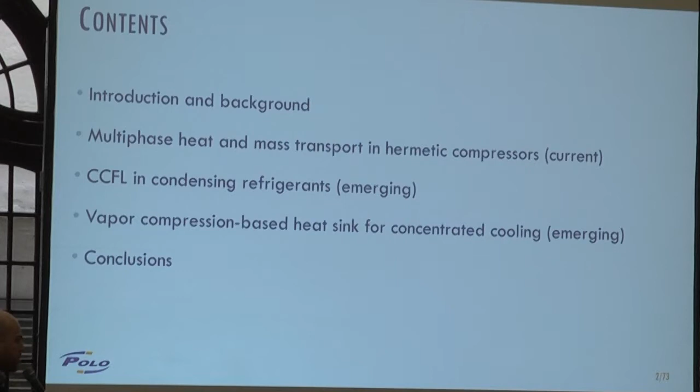The other topic is the countercurrent flow limitation in condensing refrigerants. Although condensation in thermal systems and refrigeration systems happens in any application, in oil-free compressors it brings some new interesting aspects into the analysis. And then finally, I'm going to present an emerging application of vapor compression cooling systems for cooling of electronics and power electronics.

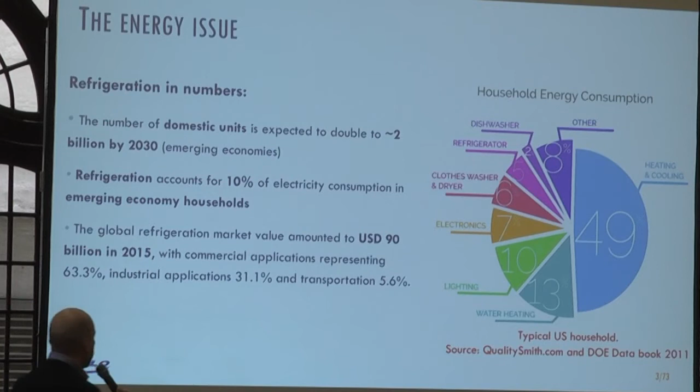So refrigeration is all around us. The numbers are actually very impressive if we consider all the segments of the technology, from fruit preservation to transportation and room air conditioning. If we only consider domestic units, the numbers are still very impressive. According to the United Nations, there are more refrigerators than cars worldwide, and also considering the emerging economies, the number of domestic units is expected to double in the next 12 years or so.

In terms of the share of refrigeration, it accounts for about 10% of the electricity consumption in emerging economy households. In developed countries, this share becomes even larger if one considers heating and cooling. So it's a very important industry, and the numbers are quite impressive indeed.

As a community, we have done quite well in terms of reducing both the direct and the indirect effect of energy and the environmental impact. If you consider the TEWI, which is the total equivalent warming impact, in the past 30 years or so, both parts have declined quite considerably. The direct effect is related to the emissions of refrigerant upon discarding a refrigerator or if you have a leakage. And the indirect effect is related to the emissions of CO2 associated with the burning of fossil fuels to generate electricity to run efficient and inefficient systems.

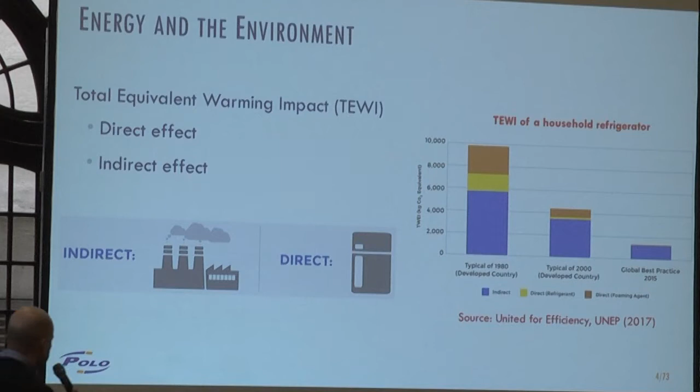The evolution is impressive, yes, and it's also driven by regulation. Hearing Professor Mastorakos's talk yesterday, the same thing happens in refrigeration. First, there is a challenge, the standards and labeling, and then the industry makes it happen, and then after that, only the scientific community tries to understand what's going on.

We have gone a long way into improving the efficiency of compressors. This red line shows the energy consumption of a household refrigerator over the years. Although the size of the refrigerator has increased a little bit, the volume, the blue line, there are still many challenges, most of them related to replacement of the global warming potential refrigerants. They are going to be replaced by hydrocarbons or CO2, and they also have their problems in terms of flammability, high pressures, and so on.

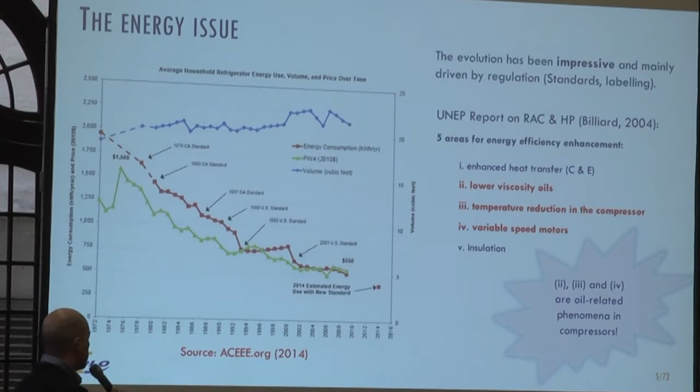About 15 years ago, when I was starting my career, I read a United Nations report on room air conditioning and heat pumps, and they identified five areas for increasing the energy efficiency in household refrigerator systems. I identified three main areas related to multiphase flow and heat and mass transfer, which were interesting to study, and all of them were related to the oil interaction with the refrigerant in refrigeration systems and compressors. So I thought it was an interesting area to work on.

So here's where I start my talk, and here's our typical vapor compression cooling system. It is composed of two heat exchangers, a condenser and evaporator, a compressor, and an expansion device that regulate the zones of high and low pressure, high pressure in the condenser, low pressure in the evaporator. In its simplest configuration, the cooling capacity of this system is controlled by the on-off of the compressor.

So we always hear in our kitchen the refrigerator switching on and off. Basically, it's controlling the cooling capacity together with a thermostat. And there is lubricating oil sitting inside the compressor in the sump there.

This oil's main role is lubrication of moving solid parts, but it also acts towards reducing noise, cooling, and sealing. It also maintains what we call the equalizing pressure, which is the pressure attained by the system when the compressor switches off while controlling the cooling capacity. The oil absorbs the refrigerant inside the crankcase and reduces this equalizing pressure. The lower the equalizing pressure, the less torque is needed to start up the compressor again. Less torque means less copper in the electrical motor, and less copper means a cheaper compressor. So selecting the lubricating oil is important for that aspect as well.

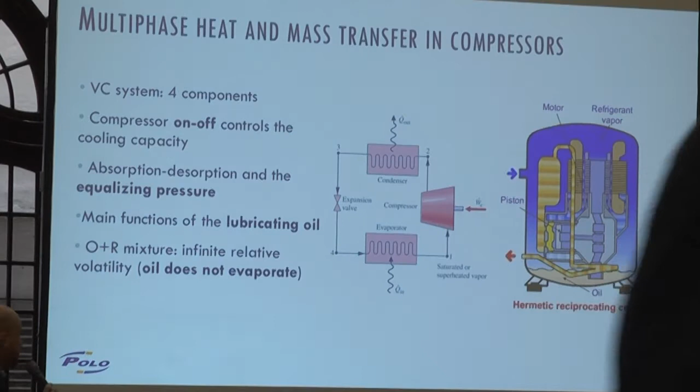So the first set of experiments we did was to measure rates of absorption of the refrigerant in the lubricating oil. We devised this PVT cell in which we have the oil sitting there, initially under vacuum. Refrigerant from this tank flows into the PVT cell, and we measure the mass flow rate. After the pressure equalizes, we close the system, and the pressure decreases as a result of the refrigerant absorption.

The interesting thing here is that with synthetic refrigerants, mainly R134A and the new types of olefins being considered, the liquid refrigerant is heavier than the lubricating oil. So we get a really unstable layer, and the absorption phenomena is dominated by natural convection. On the other hand, with CO2, isobutane, or propane—natural refrigerants—the liquid refrigerant is lighter than the lubricating oil, so the absorption is governed by diffusion only, which is a much slower process.

Here we can see typical diffusion-dominated absorption. It takes hours for the pressure to equalize. This video was one of the first studies we made a few years ago. We can see the natural convection absorption phenomenon taking place in R134A.

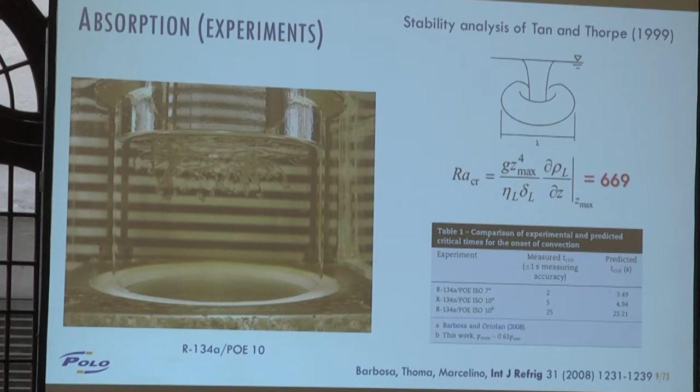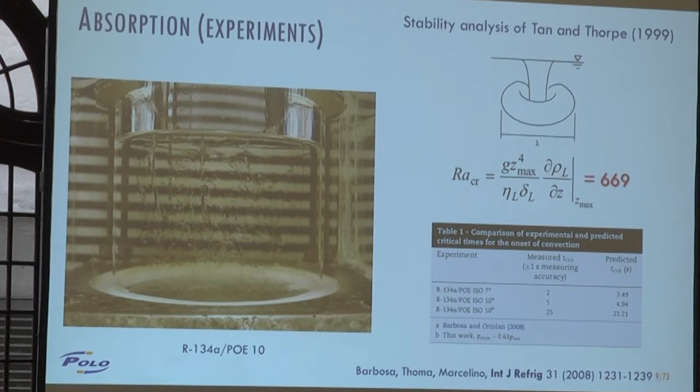Based on this stability analysis by other authors, we developed a model to calculate the critical Rayleigh number for this instability to take place. The result was that the critical time wasn't too large, so it didn't matter much how long it took for the system to become unstable—it was basically governed by natural convection. We also developed models for convection-dominated absorption. These were simple models, but they were incorporated into codes used to design compressors. Absorption governed by diffusion was also modeled, and this was very important for developing models for CO2 compressors.

When you have CO2 and the lubricating oil, the system is very non-ideal, meaning you need to consider thermodynamic non-idealities in order to calculate this diffusivity. The swelling effect is also very important—the refrigerant is absorbed in the oil, and the oil layer expands quite significantly, and this has caused some problems in the field.

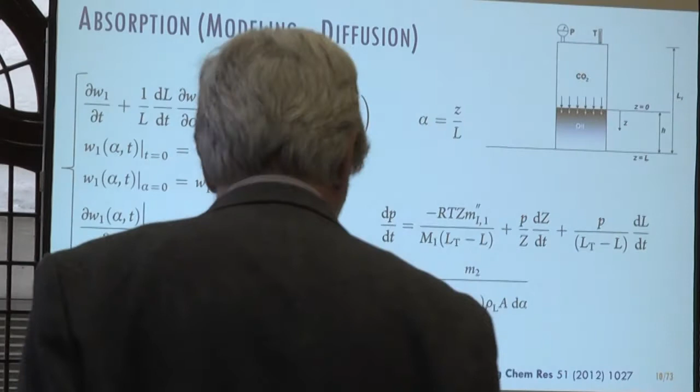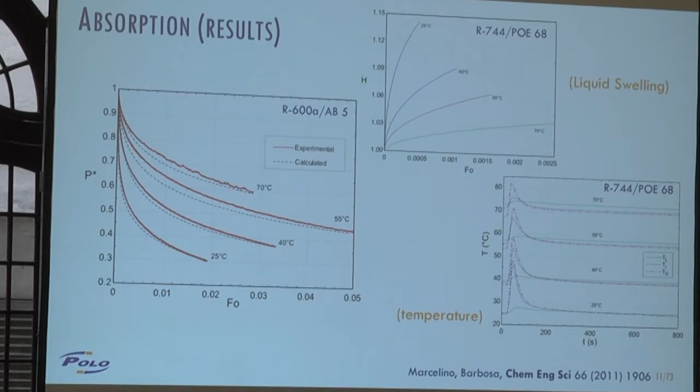The model itself is quite simple. We need to take into account thermodynamic effects, and basically what we predict is the pressure as a function of time to check if the model is working fine. We can see here that the pressure behaves accordingly with the experiments, and here is the swelling effect of the CO2 absorption, which can be quite significant.

Now moving on to the other aspect of the problem: foam formation. We did some batch desorption experiments. This is the test section we used, quite different from the one we had before—it's a long tube because we want to see the foam growing inside. This is connected to a mass flow meter. We want to measure the refrigerant desorption rate starting from a saturated mixture inside the test section, and we have a magnetic agitator here in order to trigger the desorption phenomenon.

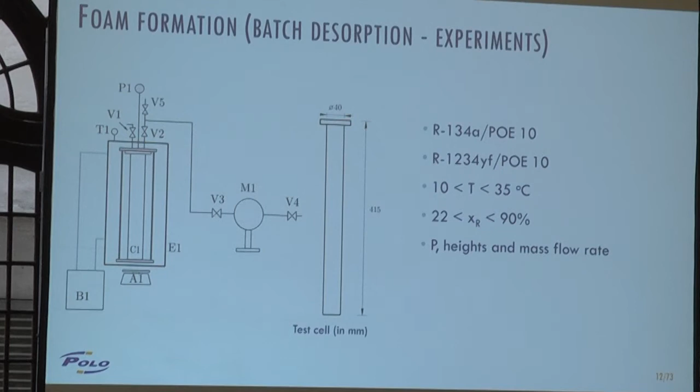So we did this experiment with R134A and 1234YF and some synthetic lubricant. Here are some videos as well. This video is quite long, so I'm going to just show some clips here.

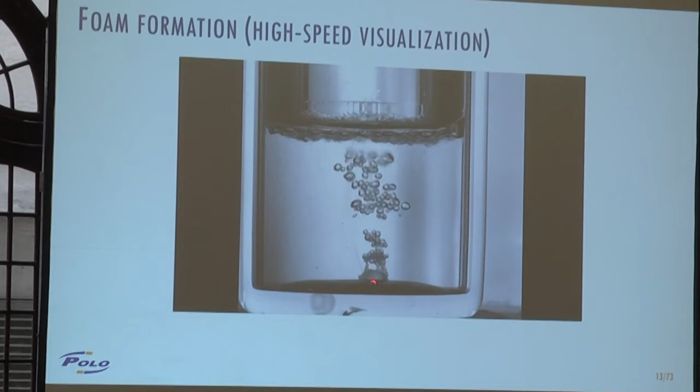So what you see here is the magnetic agitator, and the nucleation site starts at that surface. They are triggered there at the surface, and this is quite comparable to what happens in the real system, because you have the oil pump in the sump, and the sump also rotates there.

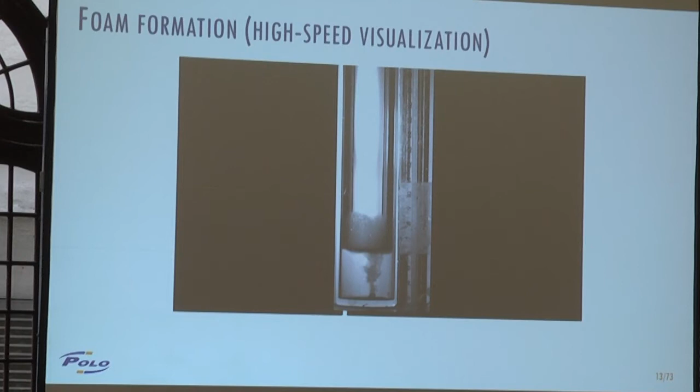And we can see the bubbles reaching the surface, and because of some surface tension forces, the foam will grow, and you can see the typical foam structure with the plateau borders, the foam growth, and then later the foam decay.

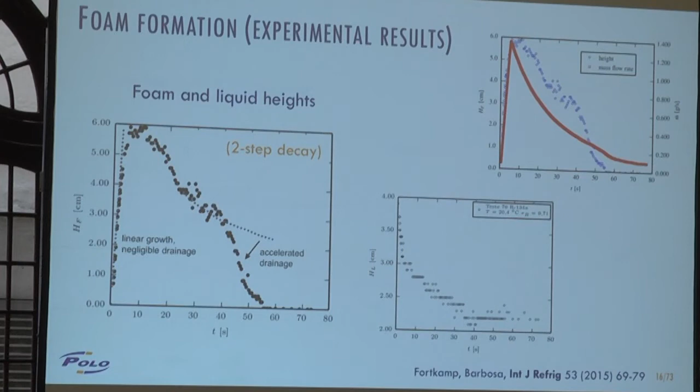And we adopted a control volume approach to model this problem, based on mass transfer rates between the two domains. So an overall mass balance is used to calculate the height of the liquid layer, and then there's a liquid species mass balance to calculate the concentration and so on.

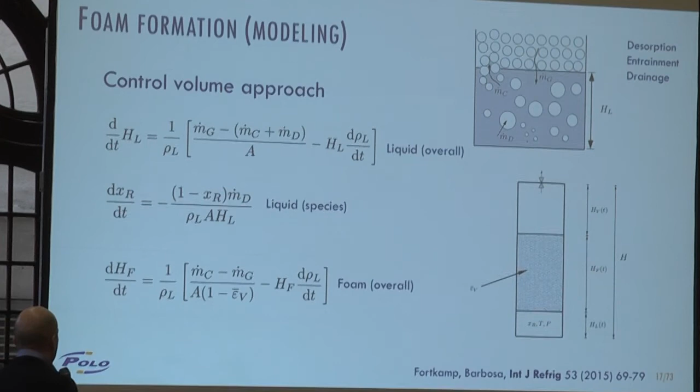And we rely on closure relationships for these mass fluxes. So the m dot d is the desorption mass flux, basically associated with the evaporation at the interface of the bubbles. Then we have the entrainment mass flow rate, responsible for carrying liquid from the bottom to the foam layer, and finally the drainage through the plateau borders reaching the bottom layer. We have developed some phenomenological models for each one of those fluxes.

The desorption mass flow rate - we relied on classical nucleation theory to come up with a relationship for that. Basically, we have inside this mass flux a Gibbs number, which is the relationship between the mechanical work required to create the bubbles and the liquid supersaturation, which is the energy available to create this new phase.

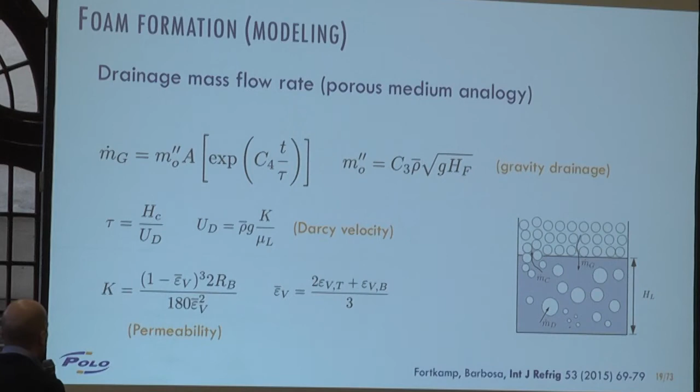And the entrainment closure relationship is based on a continuity of mass at this interface, and for the drainage mass flow rate, we relied on the porous medium analogy to calculate the flow through the plateau borders by using an equivalent permeability for this flexible porous medium.

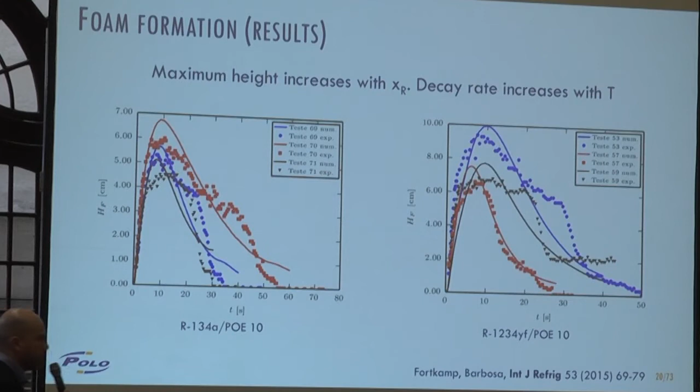Of course, we need some empirical constants to fit the model, but overall, from an engineering standpoint, the results were quite good, and we could predict with some degree of accuracy the behavior of the height of the foam layer. We were not quite successful at predicting the two-step decay, because I think we need a more detailed, multidimensional approach to modeling this effect. But in order to be incorporated into design codes, it was quite successful.

Obviously, running in the background, we have to have some infrastructure to characterize these physical properties, so we can measure not only the viscosity, but also the phase behavior of these mixtures and other properties as well, such as electrical properties and some surface properties.

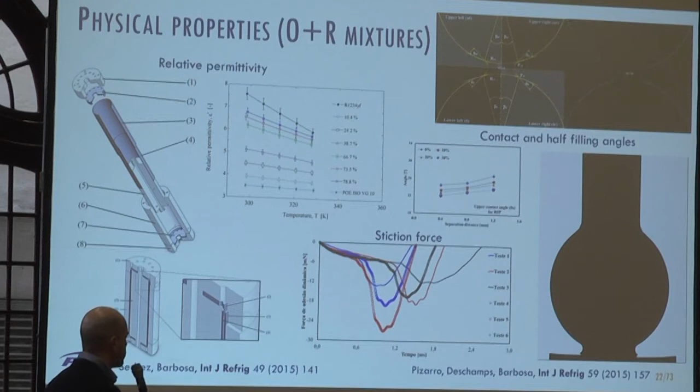So now moving on to the second part of the talk, I'm going to talk briefly about this issue with the countercurrent flow limitation in condensing refrigerants. The main drive for this research is the use of oil-free compressors. So when you have a compressor that is oil lubricated, the compressor has to sit at the lowest part of your system, because the oil needs to go back to the sump by gravity.

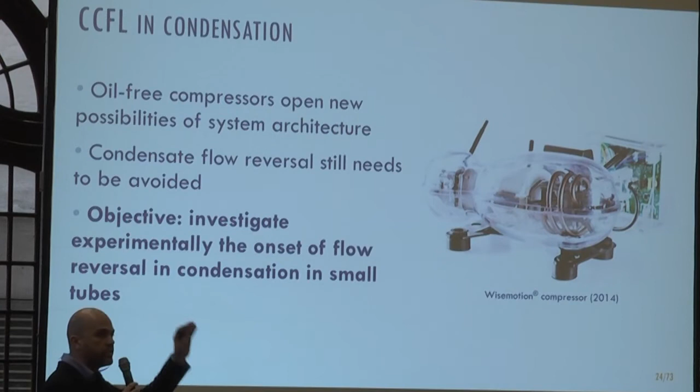When you have an oil-free compressor, the designer has the freedom to position the components of the system at his or her will, provided that liquid formed in the condensing line does not flow back to the compressor through the discharge. So this is a classical problem - countercurrent flow limitation, flooding, and flow reversals - a classical problem in the nuclear industry, but then we found some interesting application here in refrigeration system design. So we want to basically look at this problem.

We have an upward flow of refrigerant, which is condensing in a vertical or inclined tube. As the liquid is formed, the gas loses its ability to carry the liquid upward, so the liquid that is formed starts to oscillate. And this is what we don't want.

So we have this experimental facility here. It's basically a refrigeration loop. We have the oil-free compressor, and here we have the condenser, the first part of which is our test section. We guarantee that at the inlet of the test section we have a fixed inlet superheating degree, and so we have condensation.

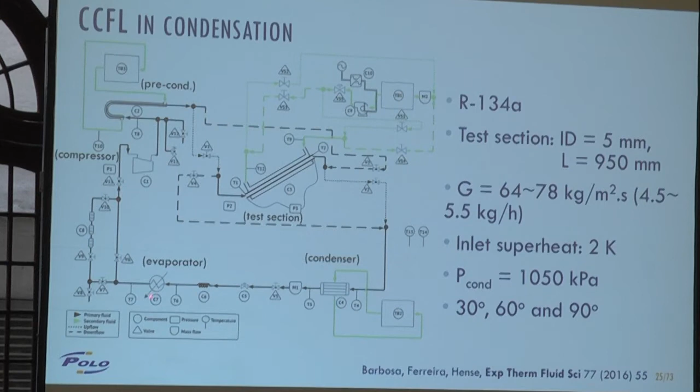Here is a counter current flow heat exchanger. Then downstream of this test section we have another condenser, just to make sure that we're not going to have a two-phase mixture entering the expansion device, then an evaporator, closing the system.

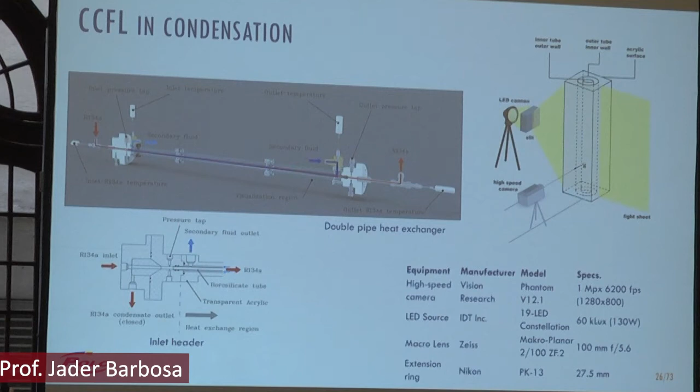So this is a closer look at the test section. It's a counter current flow heat exchanger, as I said, so the cooling water flows on the inside the annular gap. In this particular study, we carried out a visualization study in order to identify the conditions at which flow reversal would start to occur.

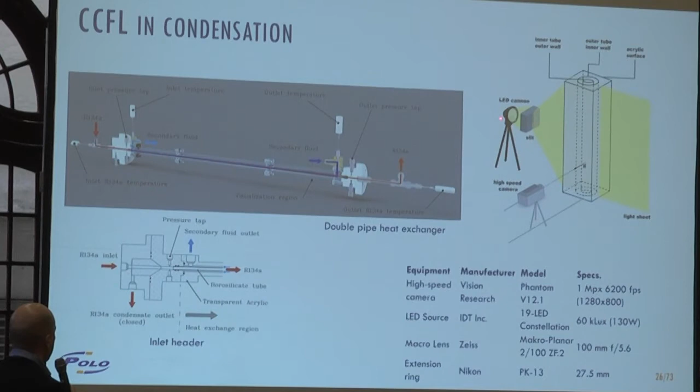So basically, here's the test section. We have a high-speed camera and an LED source with a slit in order to create a kind of light sheet to illuminate part of the flow. So here it's what I was trying to explain.

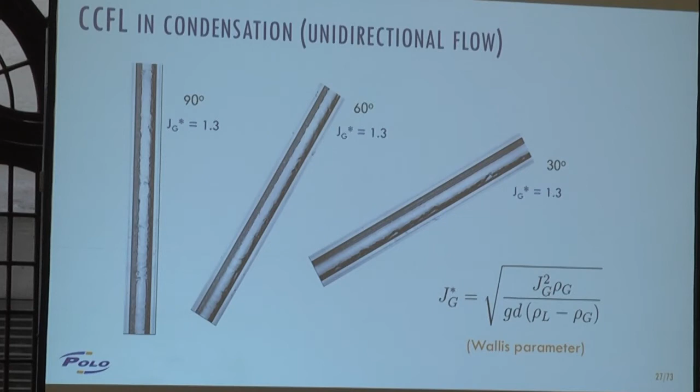When we have a high vapor content, the so-called Wallis parameter, which is a modified Froude number, is greater than 1. That means the vapor is capable of carrying the liquid upwards. But as the condensation rate increases, we start to have a higher liquid content, and the vapor loses momentum to drag the liquid upwards. If we increase that a little bit further...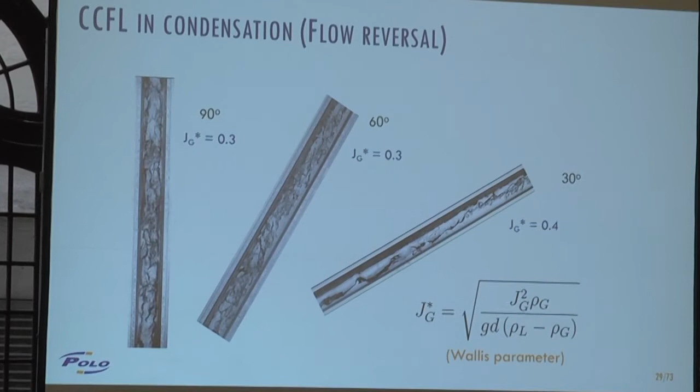...then we start to see the liquid starting to flow back, and that's what we don't want. We don't want to see this transition from annular to churn flow. Not that we don't want to see it, we just want to make sure that it doesn't cause any unwanted effect.

So in this particular study, we developed an image processing technique composed of a few steps, in order to make those images of the liquid film into a spatial temporal array, so we can study their time and position dependent characteristics.

So basically we digitize the images, and this video shows, for downward flow, what we have in terms of the liquid film on one side of the tube.

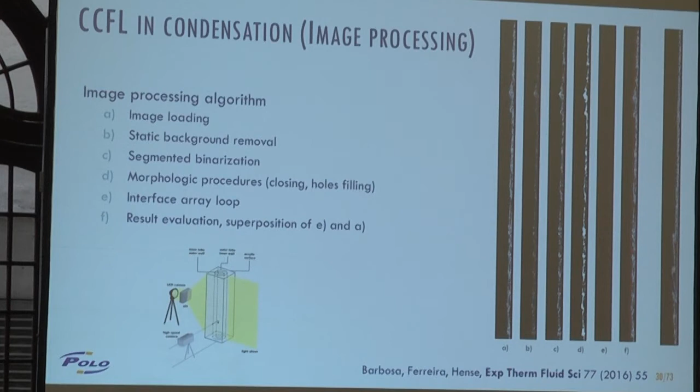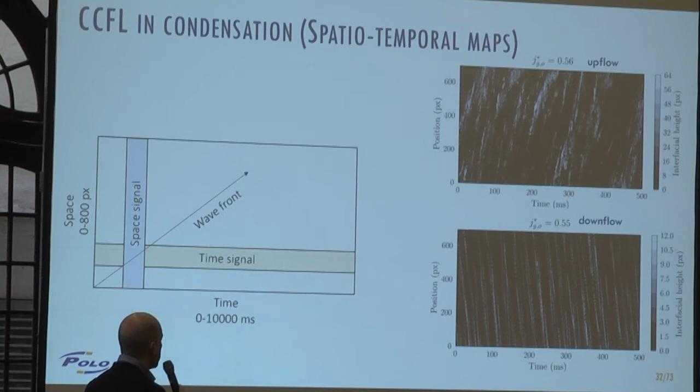So in this condition here, the Wallis parameter is greater than 1, so in upward flow the flow is unidirectional. But when we have the Wallis parameter on the order of 0.5 to 0.6, we can see that the wave starts to decelerate and have a behavior which is seen in adiabatic annular flows, related to the onset of liquid entrainment and so on. This was actually one of the first studies to measure this wave behavior in condensing systems.

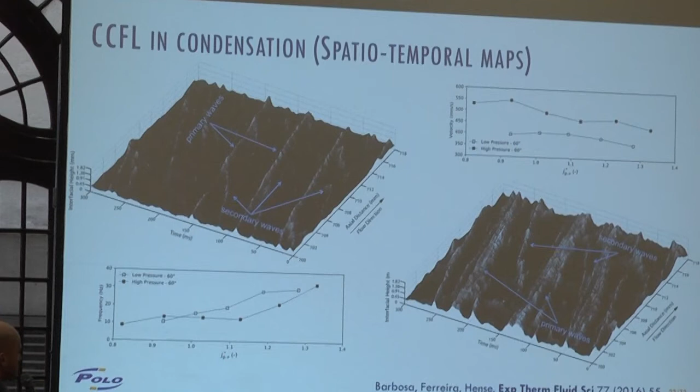So another study we did, trying to explore this technique a little further, was to study slug flow initiation, which is not related to refrigeration but is an important problem in the oil industry. We used the same technique in order to capture the formation of liquid slugs.

And since this is a turbulence conference, I thought it was interesting to mention that we used a turbulence model here to try to model this phenomenon of slug initiation using a CFD code. The results were quite encouraging, but we need to improve this from the side of the mathematical modeling and the experimental technique as well.

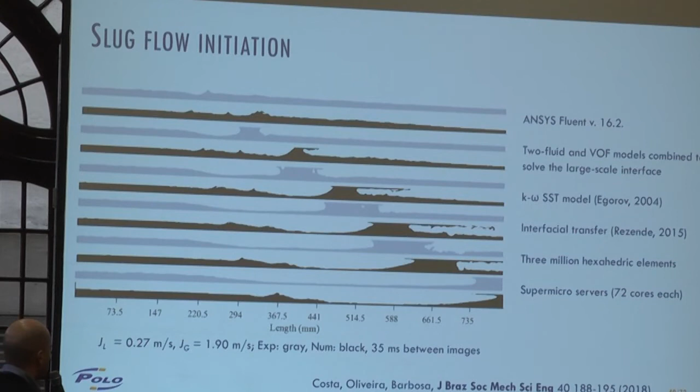And we can see, when comparing the experimental work and the numerical work, the evolution of the liquid slug along the tube.

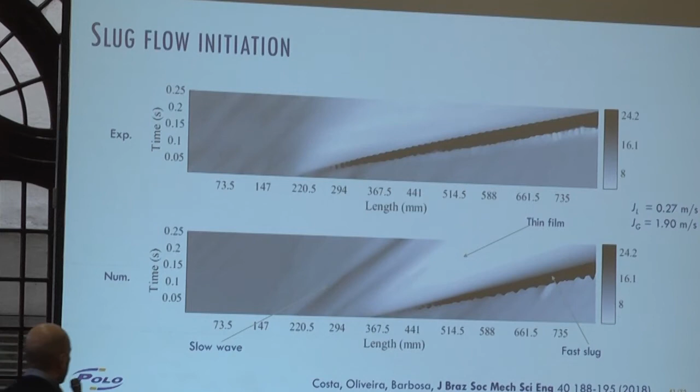So now, moving on to the last part of the talk, one needs to find new applications for vapor compression systems, and one of them is cooling of electronics, cooling of concentrated heat sources, such as power electronics and other systems.

So we came up with this idea, we call it Sphinx, and it stands for spray heat sink integrated with the expansion device. We try to explore the high heat transfer coefficient associated with impinging jets and sprays, and the unique ability of refrigeration systems of having the heat sink temperature below the ambient temperature.

When you have a liquid circulation system, the lowest temperature that you can have is the ambient temperature. But when you have a refrigeration system, you can operate at temperatures which are lower than the ambient temperature. So it's a double gain: you have a high heat transfer coefficient and a temperature inside the heat sink which is below the ambient.

So we couple the expansion device and the evaporator into a single unit. The liquid, high pressure liquid coming from the condenser will reach the top of this device and will expand through orifices, which will create an impinging jet on a heated surface.

So this is the experimental apparatus. Again, it is a refrigeration loop. In this case, we have an oil-free compressor. It's a small-scale compressor, not actually a miniature compressor, it's like a mesoscale compressor. It fits on the palm of your hand if you have a large hand, but it's still smaller than most compressors.

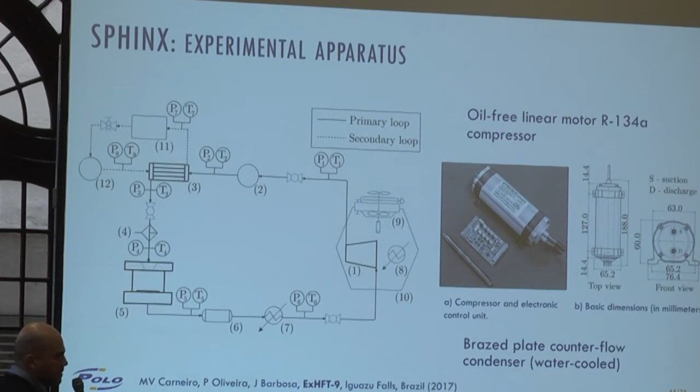Downstream of the compressor, we have a mass flow meter and condenser, and then from the condenser, the Sphinx unit, and then we have a trace heater just to control the inlet superheat into the compressor, closing the system.

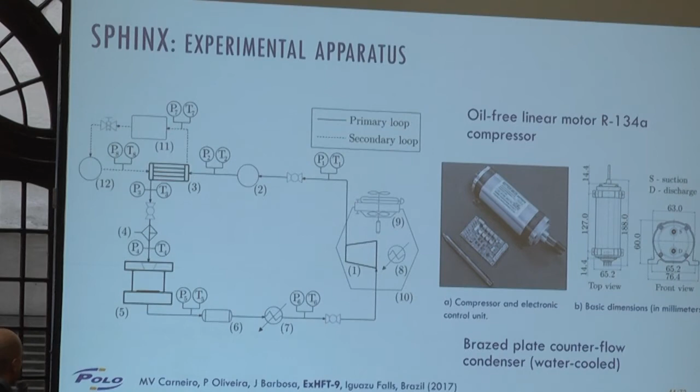In this study, we also devised a calorimeter to measure the power consumption and the heat rejection rate by the compressor. We put the compressor inside this control volume, and we have a thermoelectric cooler which is responsible for maintaining the temperature inside this ambient equal to the temperature outside. By measuring the power in and the power associated with running the thermoelectric cooler, we can calculate how much heat is being dissipated by the compressor.

So all of this system is verified against the first law. We have a very careful thermal balance there.

This is an actual pressure enthalpy diagram of the system. So 1 and 2 is the compressor, here is the condenser. From 3 to 4 is the actual useful cooling effect of this device. And then, actually the numbers are not quite right here, but this piece, 4 to 1, is the heating power associated with the trace heater that has to be used in the experimental facility, but not necessarily in the real application. I can explain that a little bit better if someone has a question.

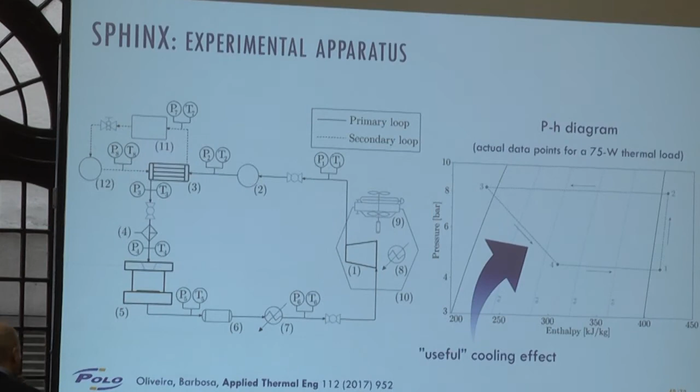So these are the independent and dependent variables in the study. Basically, we can vary the jet length, which is the height of the chamber, the distance between the orifice and the heater, the number of orifices and their diameters, the compressor stroke, although we operated in most tests at full stroke, the hot end temperature, which in the experimental facility is controlled by a thermal bath, but in the real world will be the ambient air temperature, and the thermal load, of course.

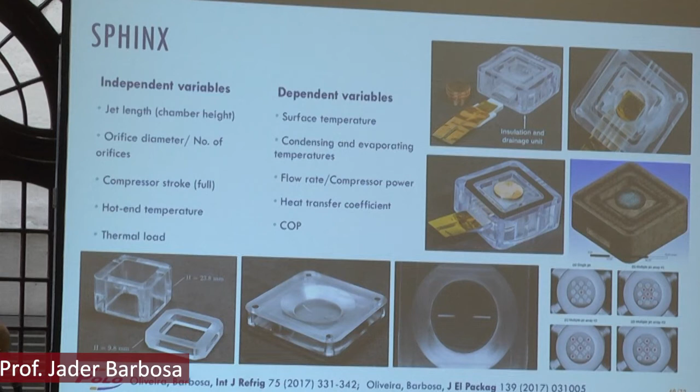Then the dependent variables: we measure the surface temperature, the condensing and evaporating temperatures. It's a closed system, so if we change one thing, the whole system responds in one way or another. The flow rate and the compressor power are dependent variables as well, and we measure them. The heat transfer coefficient can be calculated based on those measurements, and obviously the COP, which is the most important parameter in this study.

We have studied several orifice configurations during the course of this project. I'm going to explain them a little better, but basically what I'm going to show here is a comparison between colliding jets and directly impinging jets on the surface. We can play with the number of jets and their configuration, because at the top of this piece we place another piece with dummy orifices and actual orifices, and so on.

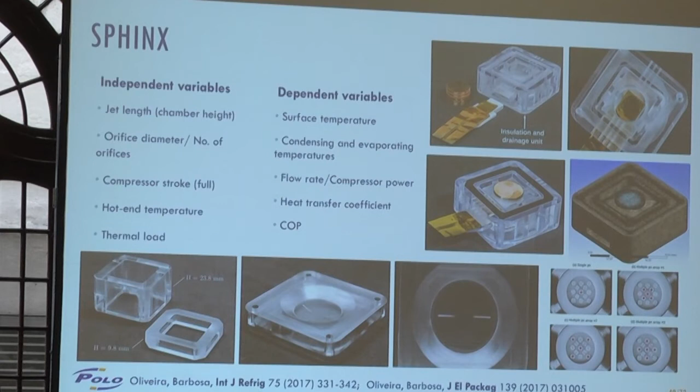The visualization was mostly done using a high-speed video camera, with some LED sources, mirrors, and diffusers. We tried not to actually measure droplet size, since that's quite a challenge in a closed system, but instead focused on the interaction between the impinging jets and the liquid film formed on the surface, and measured using RTDs on the surface.

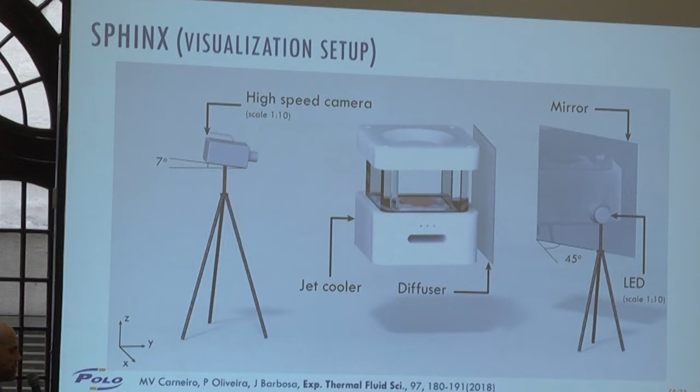So the colliding jet configuration is as follows: at the top cap we have a unit which can have 3 or 2 orifices. These are inclined orifices, and they meet at a point inside the chamber. As the jets collide with each other, they form a spray cone that impinges on the surface. It's actually a quite useful way to atomize the jet into droplets.

Here are some videos which help show that. This is for a taller chamber, and this is for a shorter chamber. You can see the 3 jets meeting at this point, forming a spray colliding on the surface there. These waves here are the spent liquid that flows on the window.

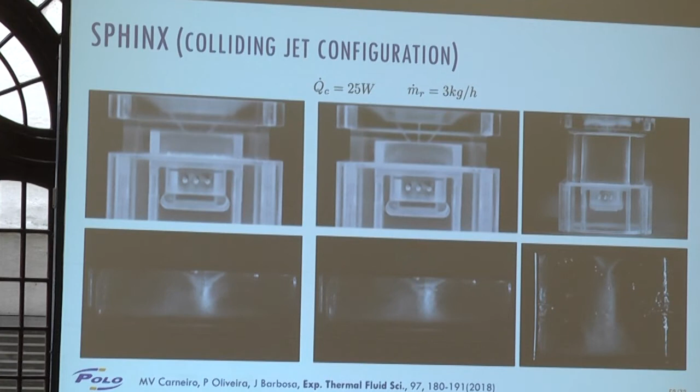The parallel jet configuration is easier to understand. Basically, we have that unit here on top. We can have dummy orifices there of different sizes, and we can play with this configuration.

In order to have a comparison that is more fair, when comparing colliding jets and parallel jets, we use the same area of passage, the same orifice area. Because it's also difficult to control the refrigerant charge due to different volumes, we always start the test with the same wall superheat for the initial thermal load. It's a fair way to compare.

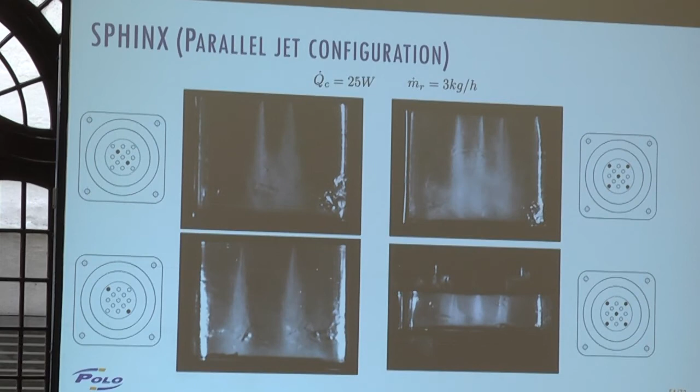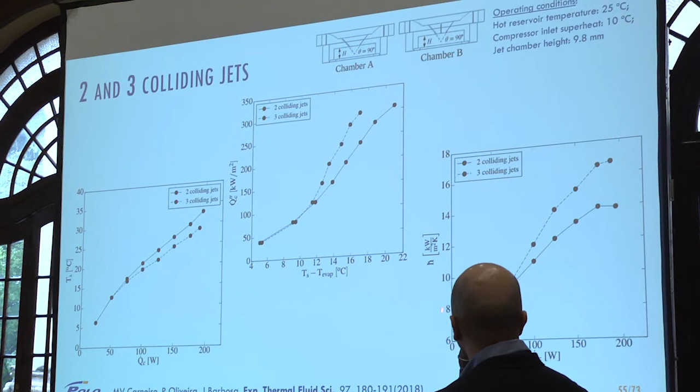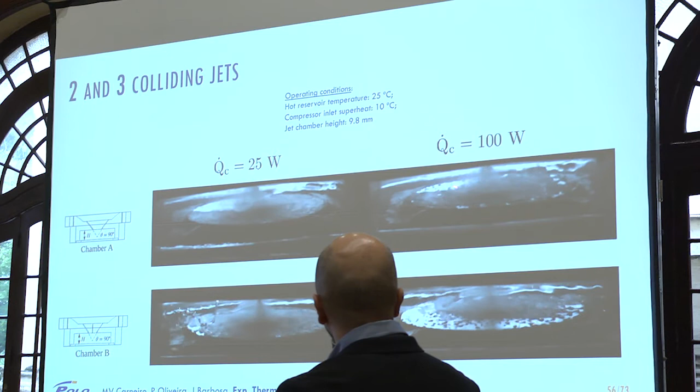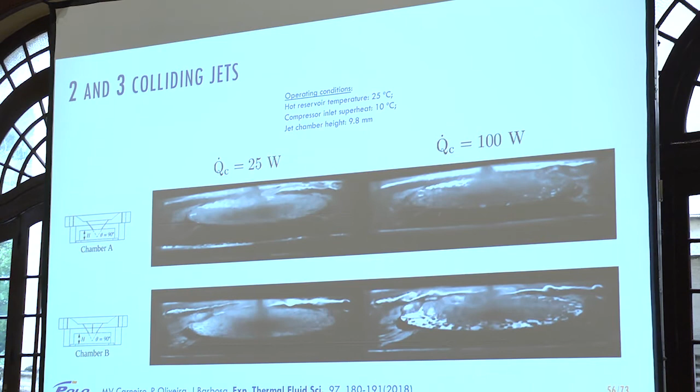These are the first comparisons we have, comparing 2 and 3 colliding jets with the same jet chamber height. Obviously, as expected, 3 jets perform better than 2 jets. You can see this from the boiling curve and the heat transfer coefficient curve. That's because we have a better distribution of liquid on the heated surface. With two jets, there is a dry spot even at 25 watts of thermal load, which persists up to 100 watts. This is the main cause for dry out, because that dry spot just grows, and it's not possible to wet that surface anymore.

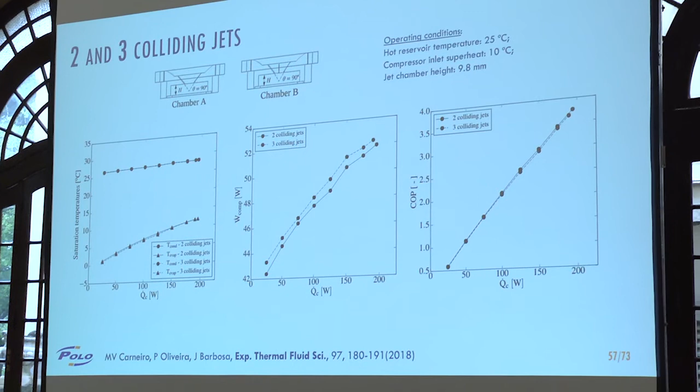For reference, we measure the saturation temperatures, the pressures, the compressor consumption, and the COP. What's interesting about this study is that we can play with the number of orifices and their configurations. The thermal response of the heater depends a lot on that, but the thermal response of the system as a whole, in terms of COP and compressor consumption, is not so different.

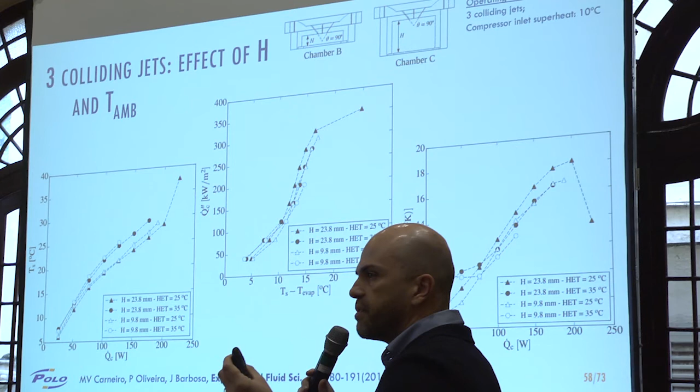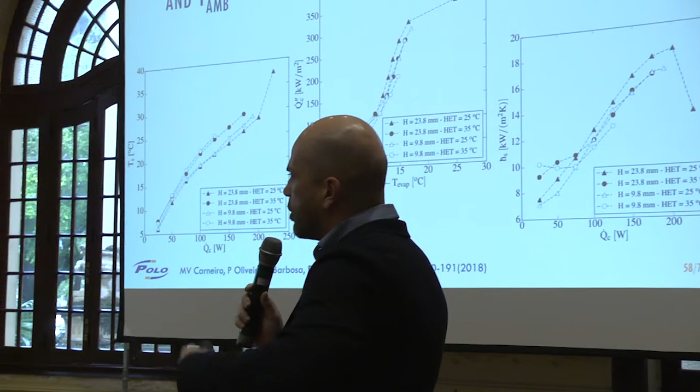Here's a comparison between the effect of chamber height for 3 colliding jets, and also the effect of ambient temperature. What we can see is that with a shorter chamber, these white symbols, dry out is reached earlier because of splattering of the liquid onto the surface. With a taller chamber, the impact circle is a little larger, so the droplets don't splash back, and the liquid is capable of wetting the system a bit better.

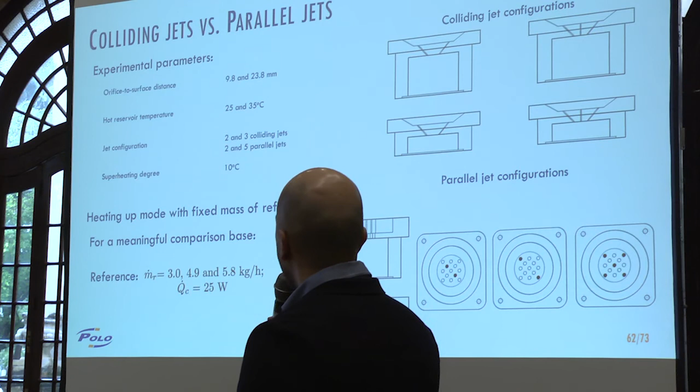I'll skip these videos since we have similar ones in the next slides comparing colliding and parallel jets. Again, for a meaningful comparison, we took a reference case using the same equivalent orifice area between the colliding and parallel jets. In the parallel jets, we play a bit with the configuration of the active orifices.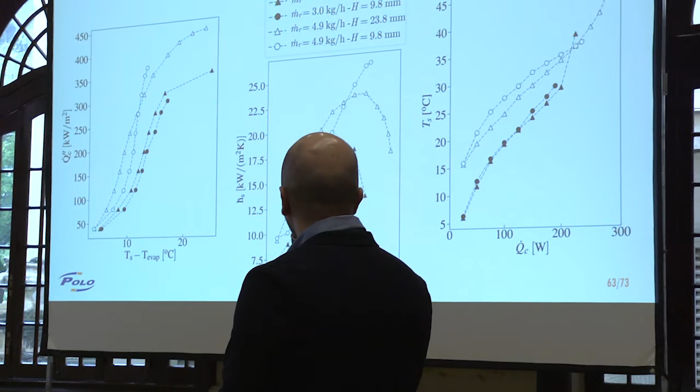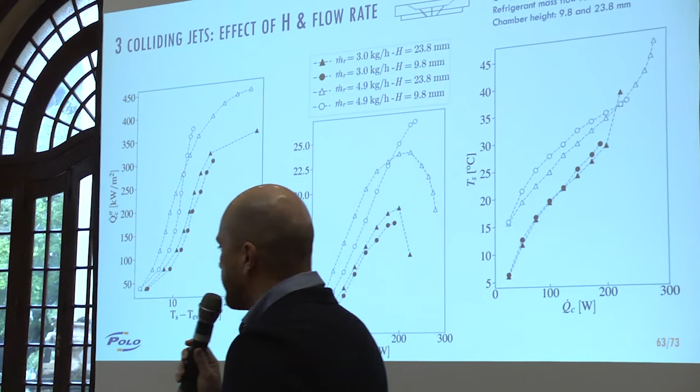This is the effect of H, the height, and the flow rate. Basically, the higher the flow rate, the better the response of the system. Impinging jets and sprays are very sensitive to the flow rate, so when you increase the flow rate, the heat transfer performance increases quite well. And this is the boiling curve.

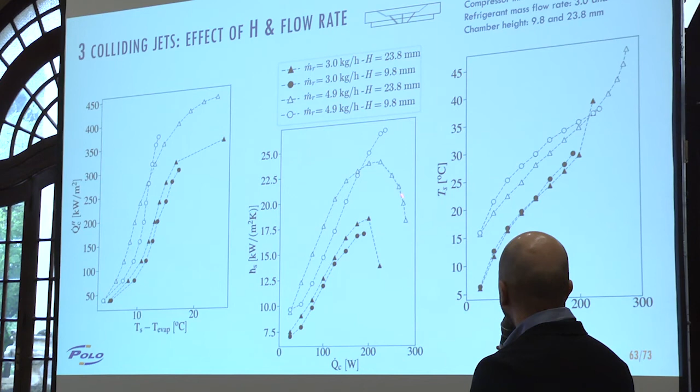We can see that the higher heat transfer coefficient is achieved for the higher mass flow rate, and for the colliding jets, we can see the decrease of the heat transfer coefficient because of the increase of that dry spot. For some reason, for colliding jets, the dry out is not as sharp as in the impinging jets.

So I think I'm running out of time. I'm going to just show this video here for two flow rates.

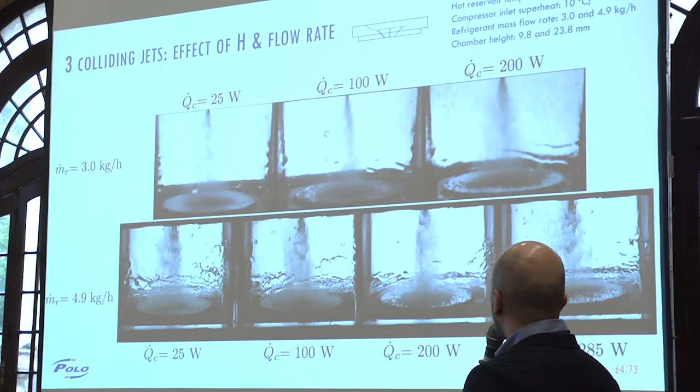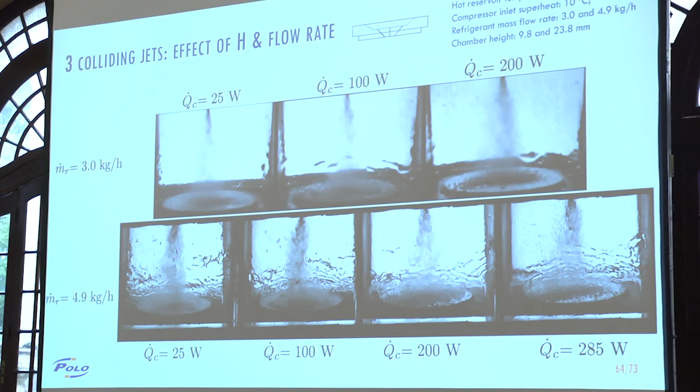As we increase the thermal load, we can see that the liquid starts to dry here at the surface. So what is clear here to us is that in order to improve the effectiveness of this system, we need to work on the surface. We need to increase the wettability of the surface in order to stick the liquid more onto the surface and delay that dry out. This is something we are going to pursue in the next steps of this work.

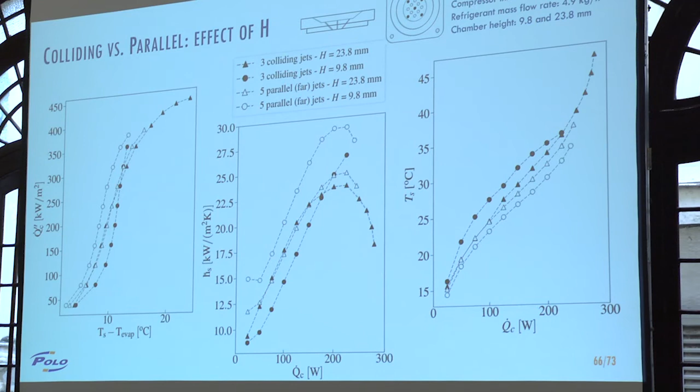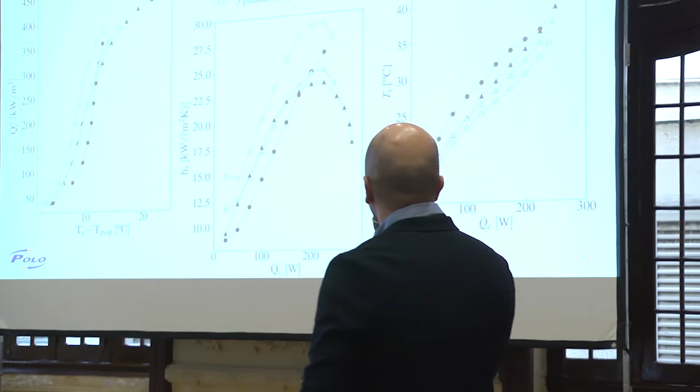And this, just to finalize my talk, the comparison between the parallel and the colliding jets. As I was saying, the dry out in the parallel jets is much sharper than in the colliding jets.

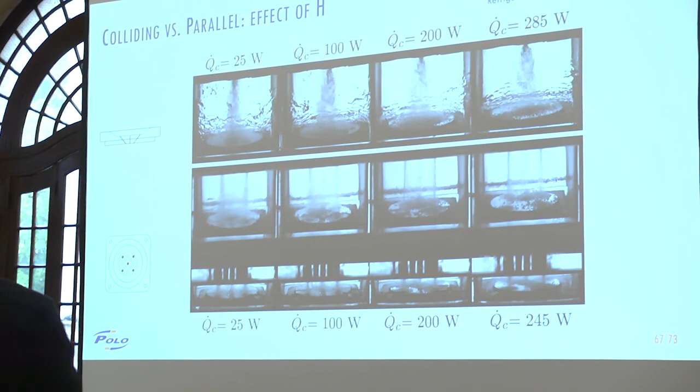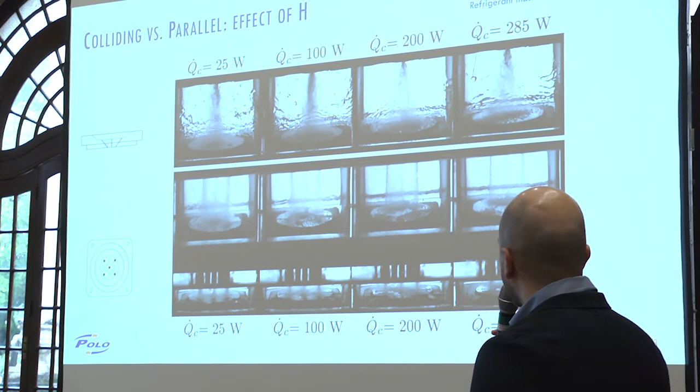Although the thermal response of colliding jets is a little bit better, we still have to work on this liquid distribution here on the surface in order to improve the wettability of the heater.

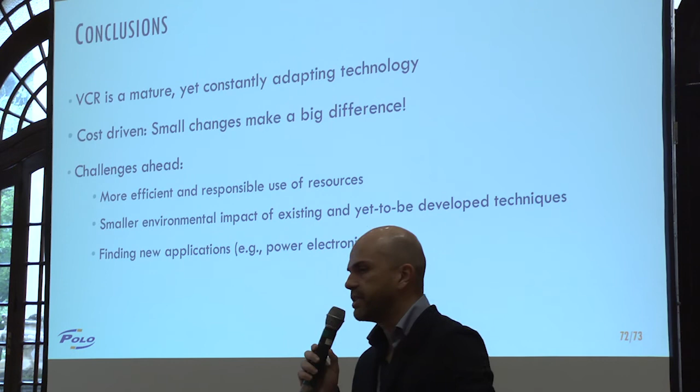So, yeah, I think I can end my talk now. And just as a final conclusion, vapor compression refrigeration is a mature but constantly adapting technology. It's an area which has been through many changes, many substitutions of refrigerants, replacements, but it somehow has managed to improve the efficiency. Of course, some areas are cost-driven, so small changes make a very big difference.

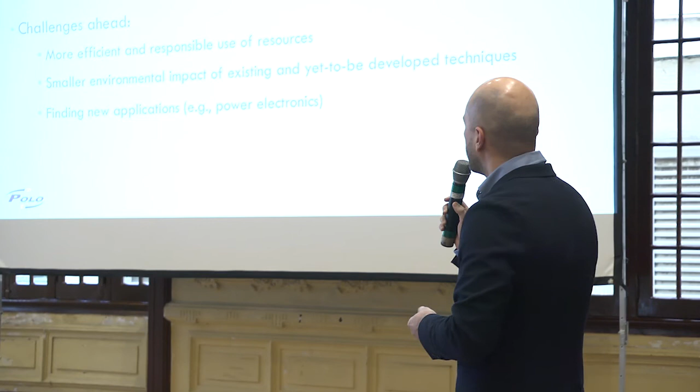And as a community, we have many challenges ahead. And the one that interests me the most is finding new applications for vapor compression and other cooling technologies. So with that, I thank you for listening to me, and I'm happy to answer any questions that you may have. Thank you.

Thank you very much, Jader. Any questions, comments?

Yes, please. One question: what is the effect of this new system on the total size of the refrigerant unit? I mean, is it more compact now because you are practically merging expansion valve and evaporation? What is the effect on the whole system size, because of the heat transfer effects and these?

It has a potential to become much more compact. Obviously, we didn't optimize for having the compressor close to it. It was an experimental facility, but the heater size is 6 square centimeters, so it may not be applicable to very small electronics, but antenna or laser cooling, it's a potential application. The device itself fits on the palm of your hand, and the compressor as well, so maybe a shoebox would be equivalent in size for some application. Thank you. It's not good enough for a laptop computer, but for a server or some other application.